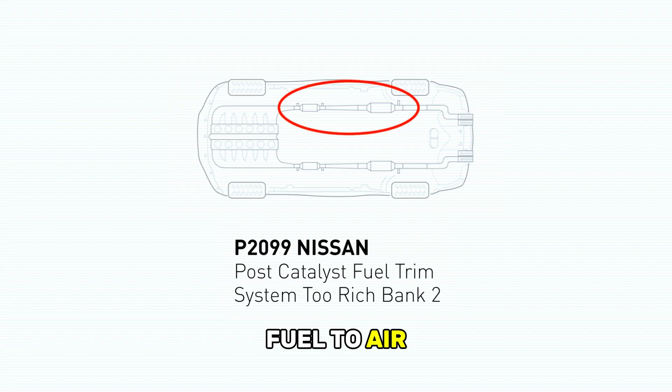Use the OBD2 scanner to scan your vehicle and see the error code P2099. It indicates the powertrain control module perceives a rich fuel-to-air mixture downstream of the catalytic converter. Here are 2 of the most practical solutions to fix Nissan's P2099 error code.

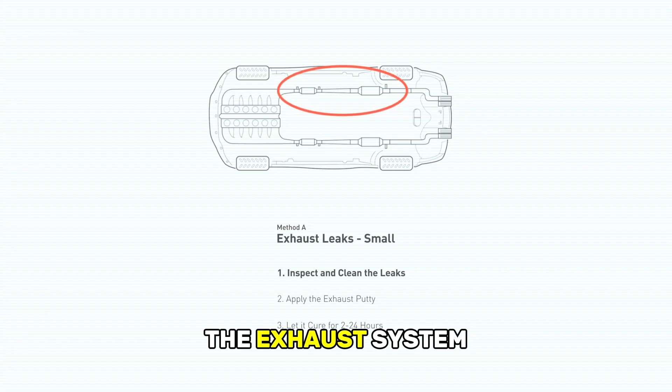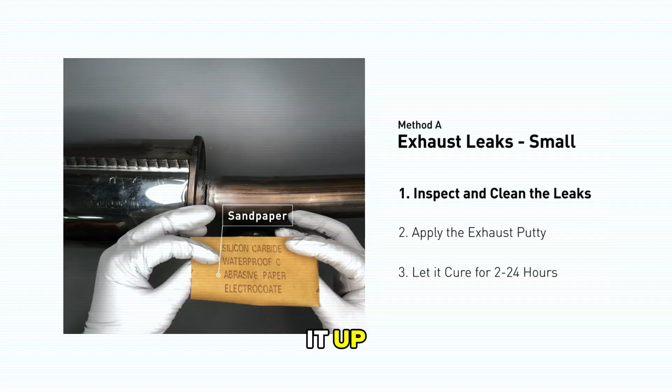Method A: exhaust leaks. The exhaust system begins at the engine combustion chambers and runs along the undercarriage of the vehicle, eventually ending with the visible tailpipe. If you have a small leak around the corner, get some exhaust putty to seal it up. First, get sandpaper and a wet wipe to clean the leaking area for better application.

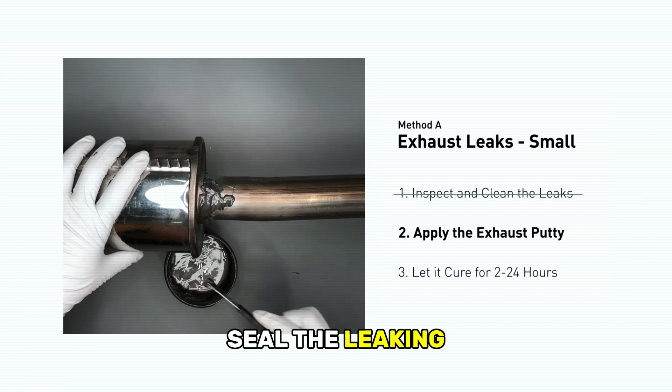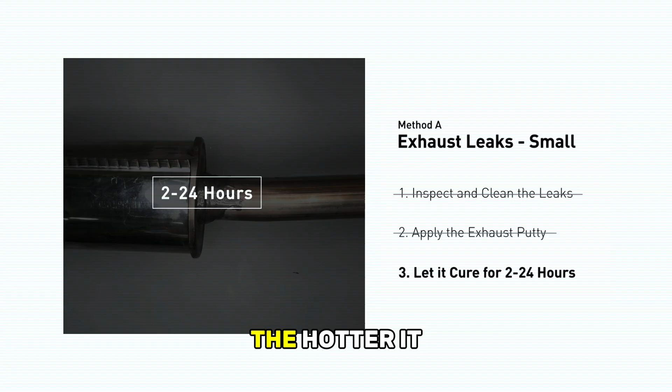Stir the paste well to activate it. Apply and press the paste to seal the leaking area. After the application, don't start the engine because the positive pressure from the exhaust will blow out the paste. Let it cure for 2 to 24 hours depending on the external temperature. The hotter it is, the quicker it will cure. That means you can use something like a hair dryer to heat it up and make it cure faster.

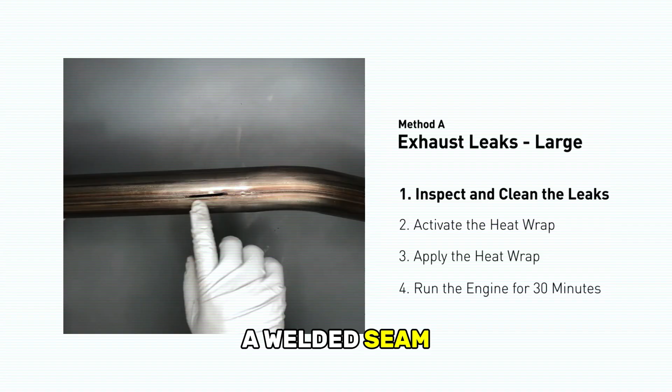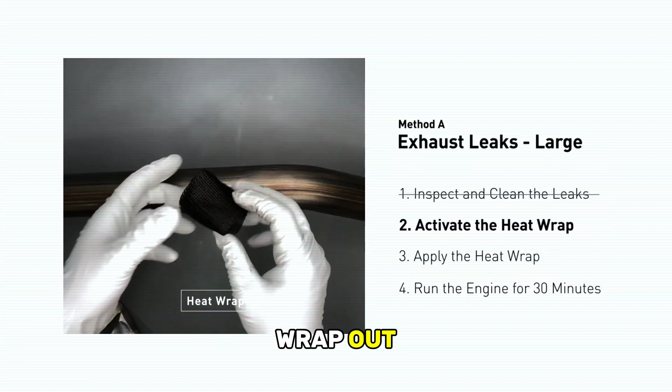Exhaust pipes are made out of rolled steel, and there is a welded seam on it. Like this one, the seam will often rot into a large leak. First, get sandpaper and a wet wipe to clean the leaking area for better application. Get the heat wrap out and put it in the water for about 30 to 40 seconds to start the activation process. Then remove it and squeeze out any excess water.

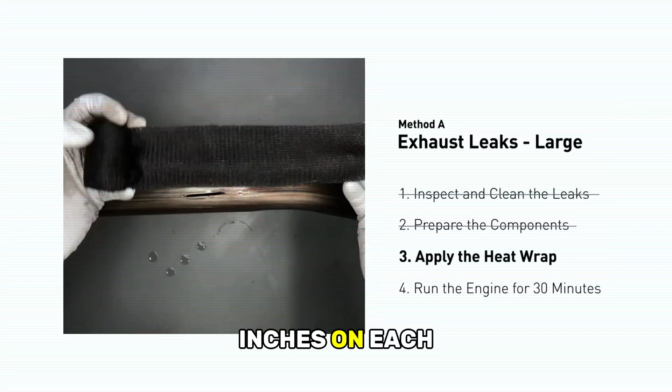Wrap it around the area and overlap it a couple of inches on each side. Repeat the process 3 or 4 times, then squeeze it to make the resin go all through it. Start the car and let it run for 30 minutes so the heat cures it and makes a permanent fix.

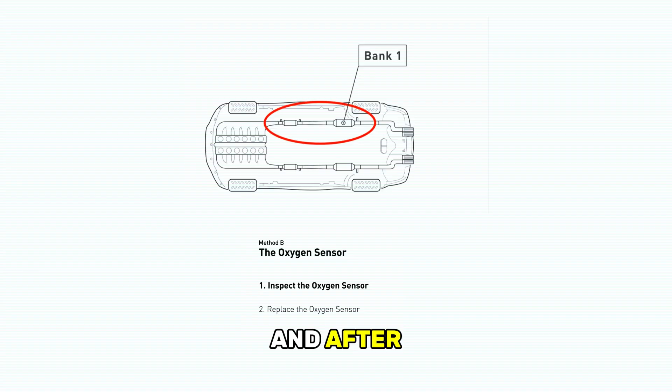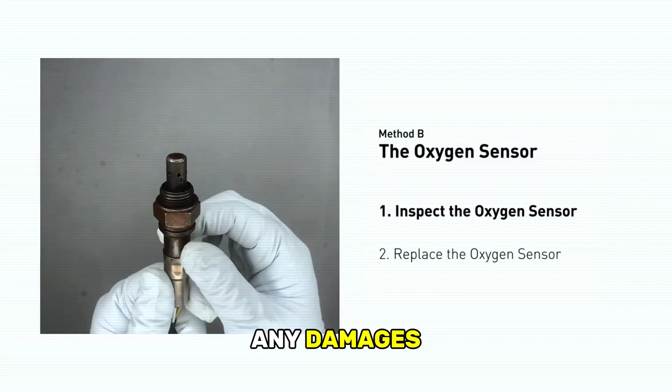Method B: the oxygen sensors. The oxygen sensors are located before and after the catalytic converter. Bank 1 is on the side with the cylinder number 1. Visually check the oxygen sensor's electrical connections, wire harness, and metal tabs for any damages. If damages are found, replace the oxygen sensors.

So here are 2 of the most practical solutions to fix Nissan's P2099 error code. After the repair, you can now use the OBD2 scanner to clear the error code, and tap the rescan button one more time to make sure everything is fine with your vehicle.